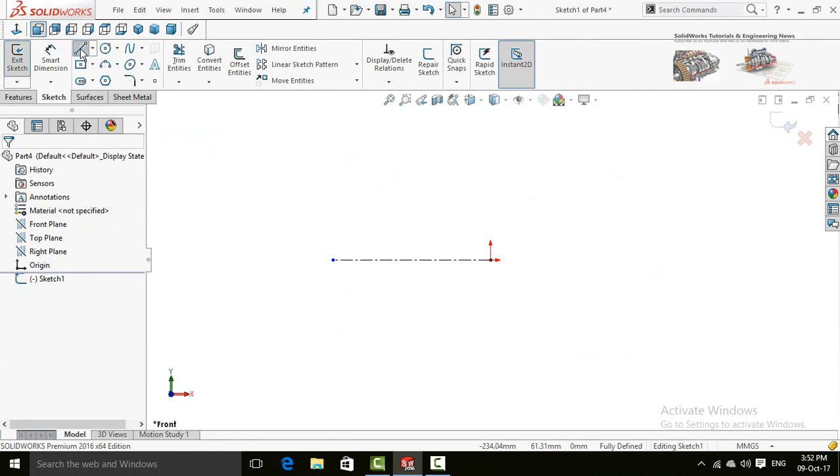So sketch on front plane. Now draw a center line. Start it from origin horizontally. Now press escape button. Again select line and draw a sketch like this.

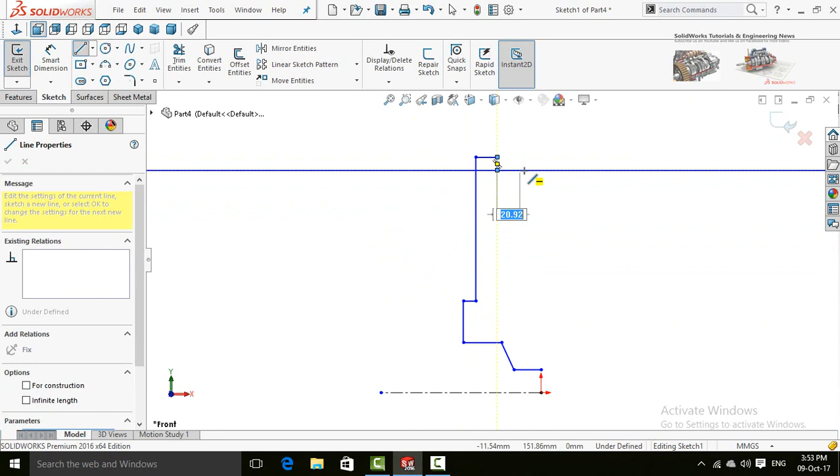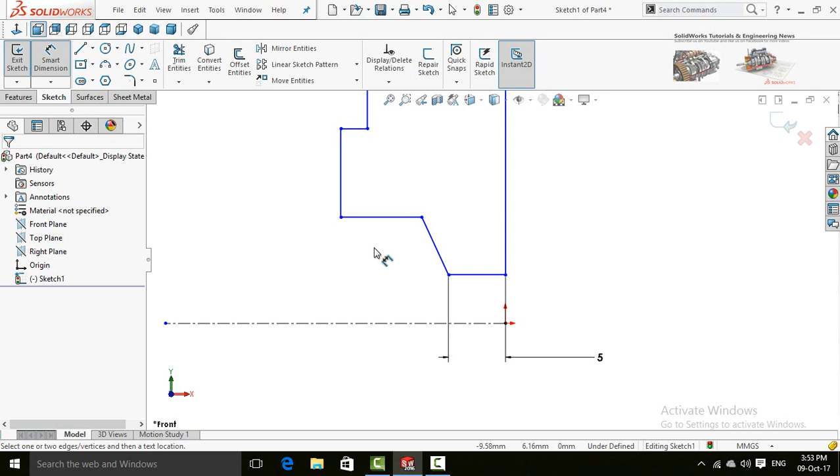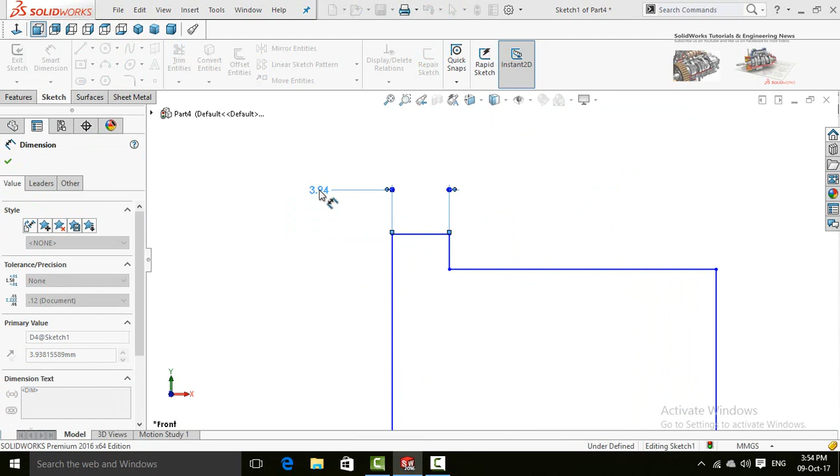Now define it by smart dimensions. So this distance is 5 millimeter. This distance is 18. This is 3. This is 20 and this is 8 millimeters.

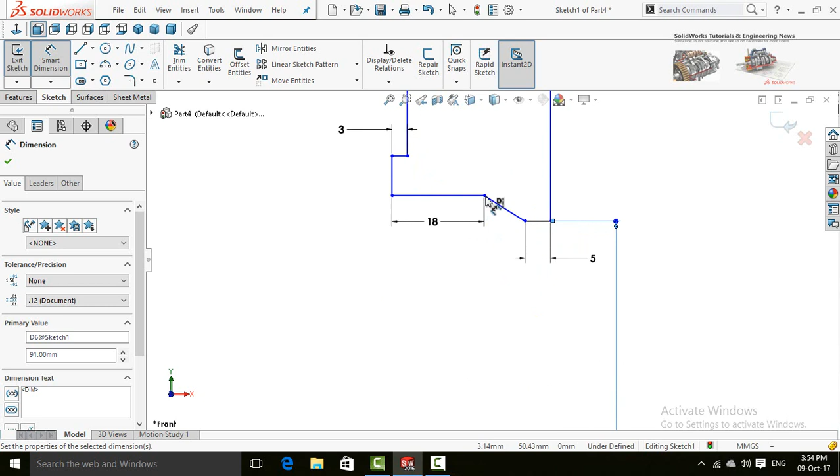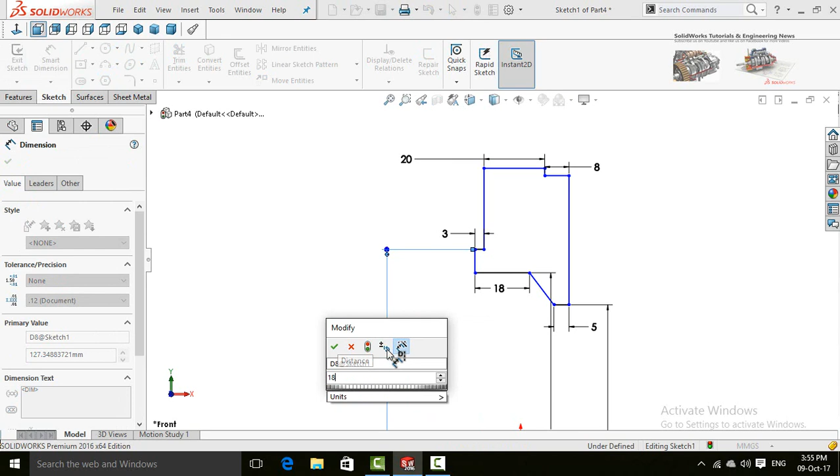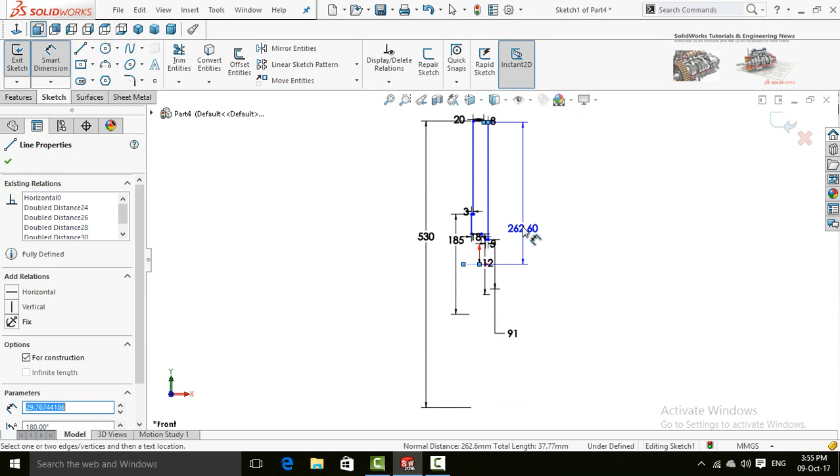Now define diameters and bores. So first of all, this bore diameter will be 91 millimeters. Diameter of this point will be 112 millimeters. This diameter 185. This diameter 530. And this diameter 463 millimeters.

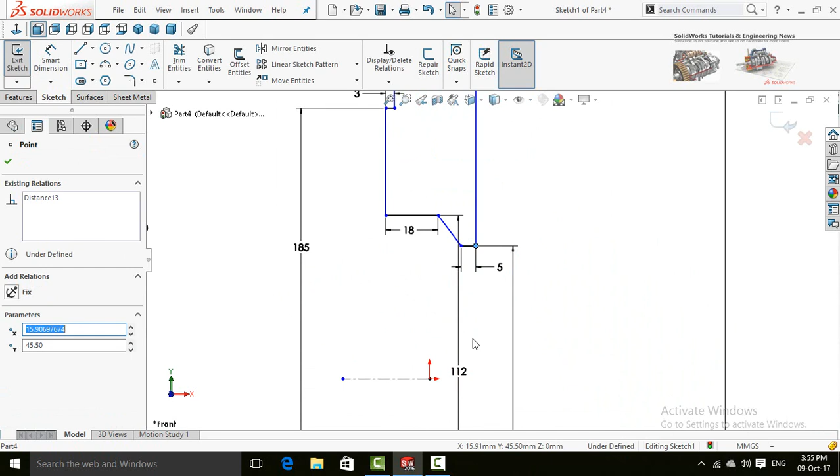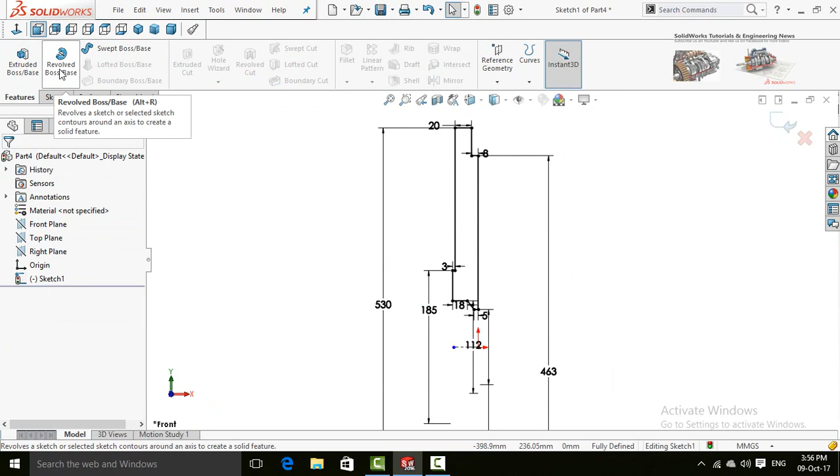Now zoom in, press and hold Control key, select this point and then this origin. Release Control key and then select relation make vertical. Now our sketch is fully defined and it is ready for revolved extrusion. So now click on Features tab and then select Revolved Boss Base command. Press OK button.

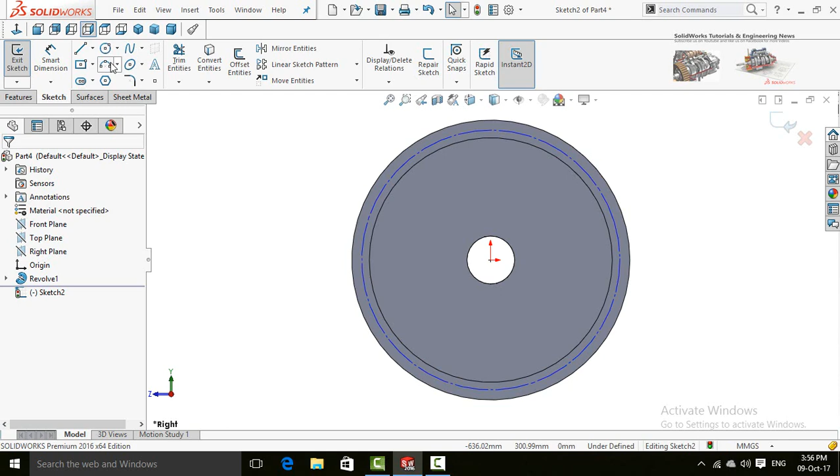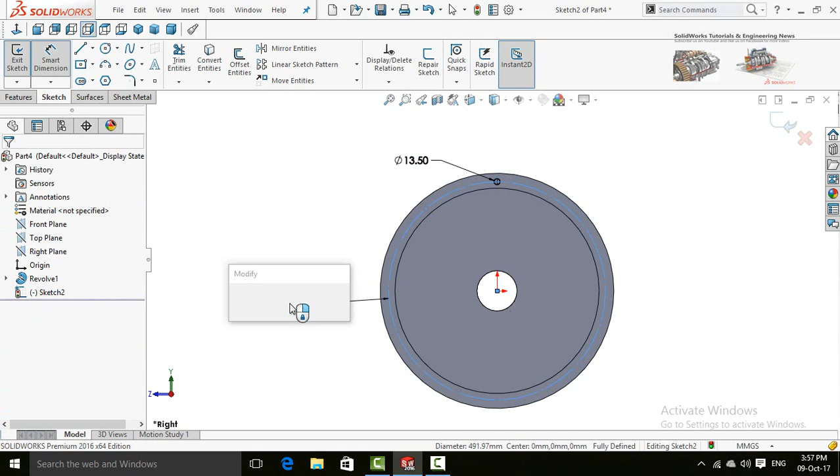Now select this face and then select Sketch. Make normal to and draw circle. In the left side, select for construction geometry and press OK button. Now draw another circle. Define it. 13.5 millimeters and define the circle, 498 millimeters. Now click on Features tab and then select Extruded Cut command. Drag this arrow and press OK button.

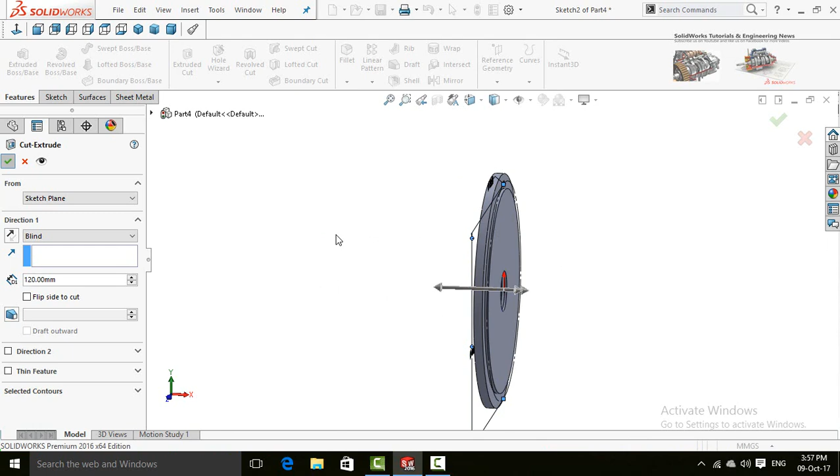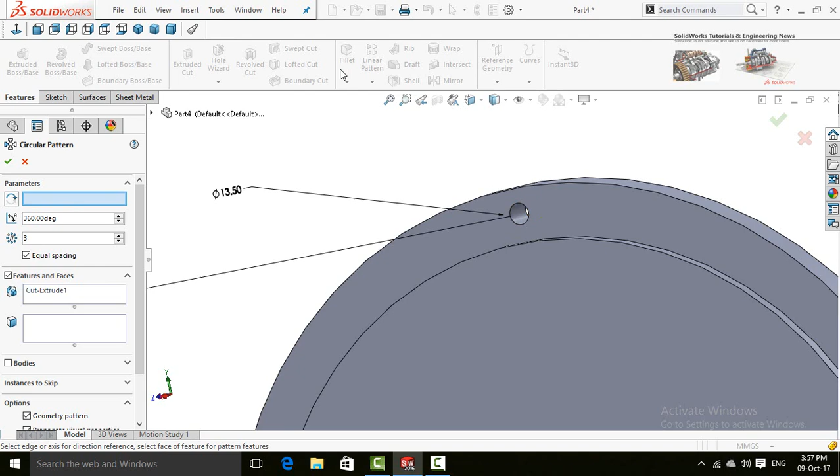Now zoom in, click on this arrow below the linear pattern button and then select circular pattern. Click on this box, features to pattern, and then select this hole. Now click on pattern axis and select this circular edge. Type here the quantity, which is 12. Press OK button.

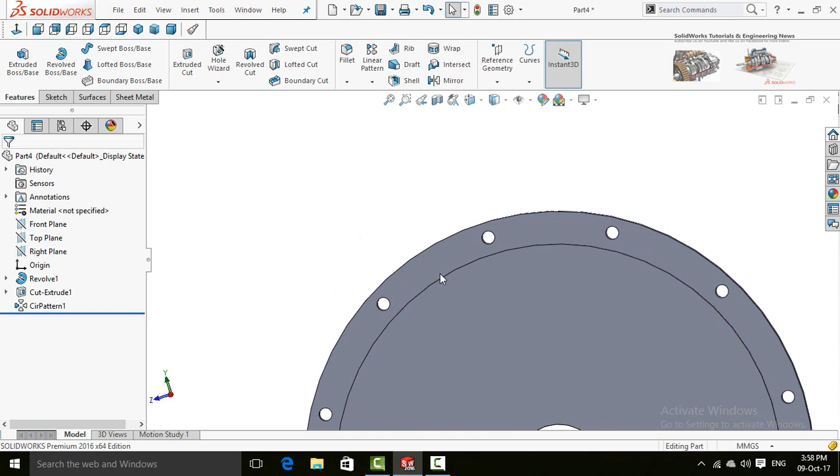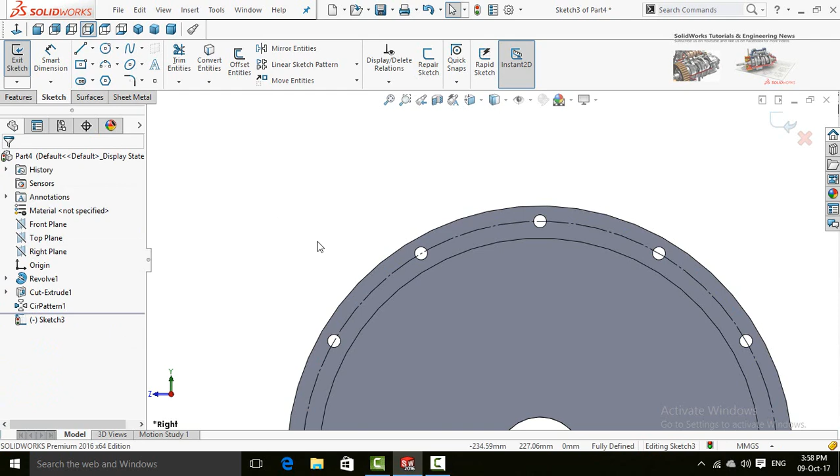Now we need 2 more circles just between both of these holes. So for that, again click on this face and then select sketch, make normal to. Now draw a circle, start it from origin to the origin of the circle. In the left side, select for construction and press OK button. Now draw a center line and start it from this origin to the origin of whole part and end it at this point. Now use trim entities command and trim rest of the circle.

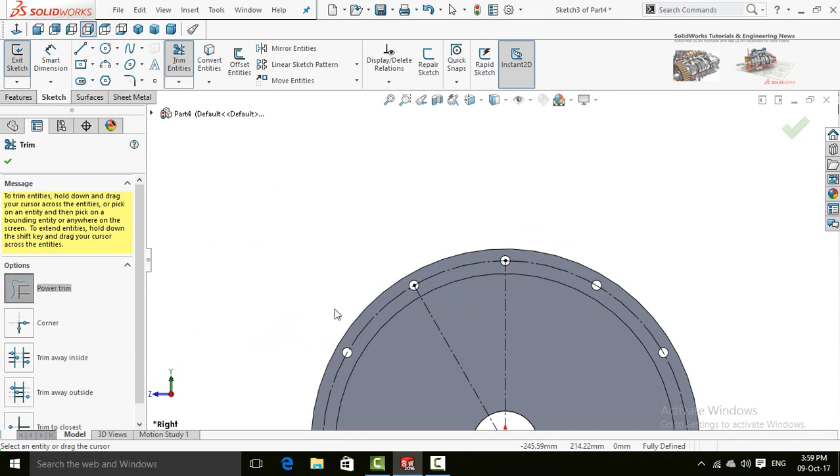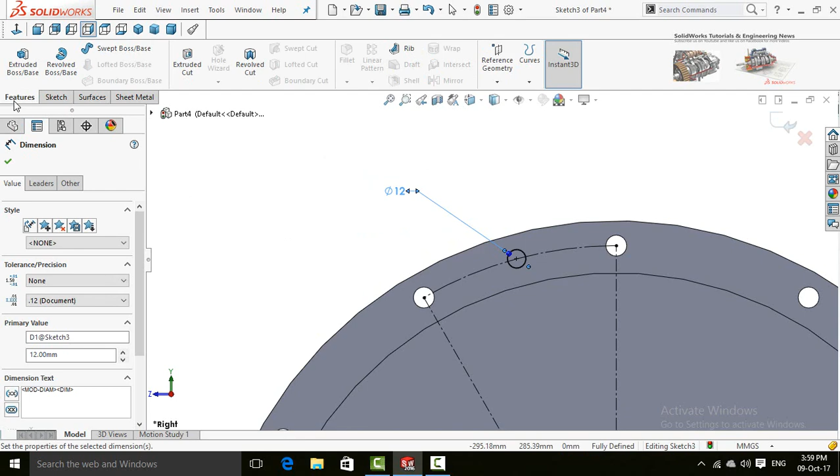Draw another circle in the quadrant of this arc. Define it. 12 millimeters. Now click on Features tab and select Extruded Cut command. Press OK button. Again use Circular Pattern command and select this circle. Now pattern axis, select this circular edge, quantity 2, press OK button.

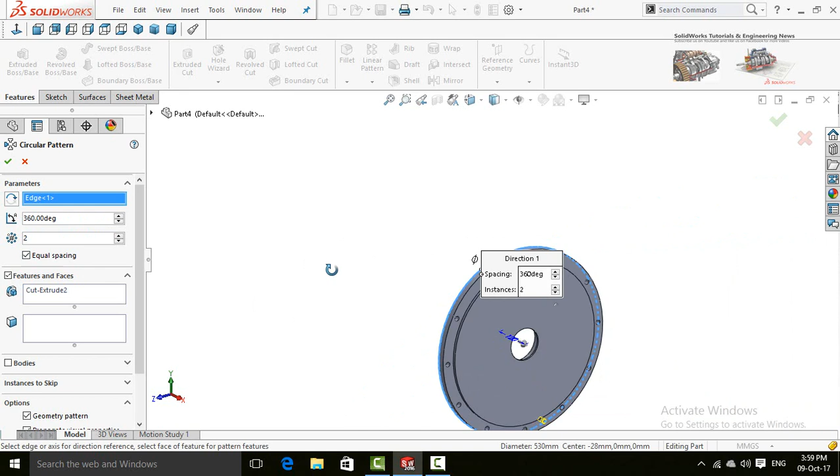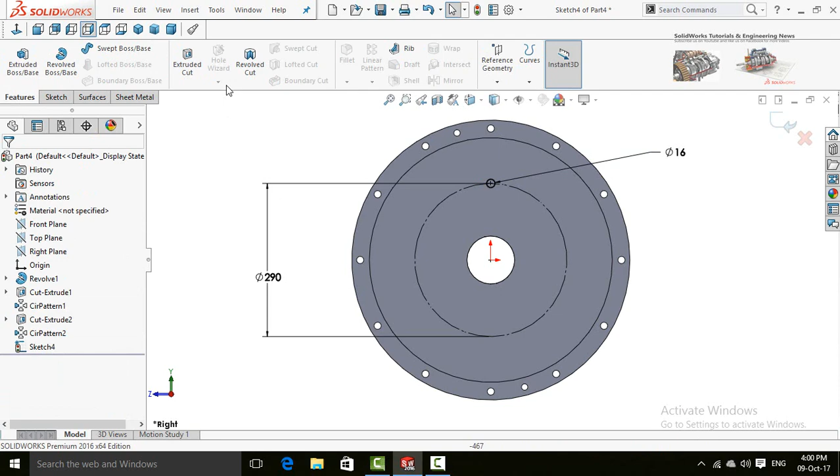Once again click on this face and then select sketch, make normal to, draw a circle, start it from origin. Similarly for construction geometry, press OK button. Draw another circle. Now define them. PCD is 290 millimeters and drill size is 16 millimeters. Press OK button and then extruded cut it. Again press OK. Use circular pattern command. Now click on pattern axis and select this circular edge. Quantity is 4. Press OK button.

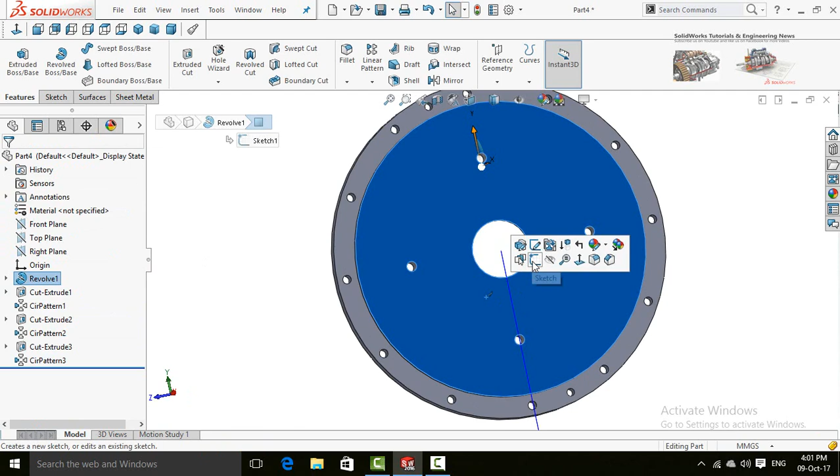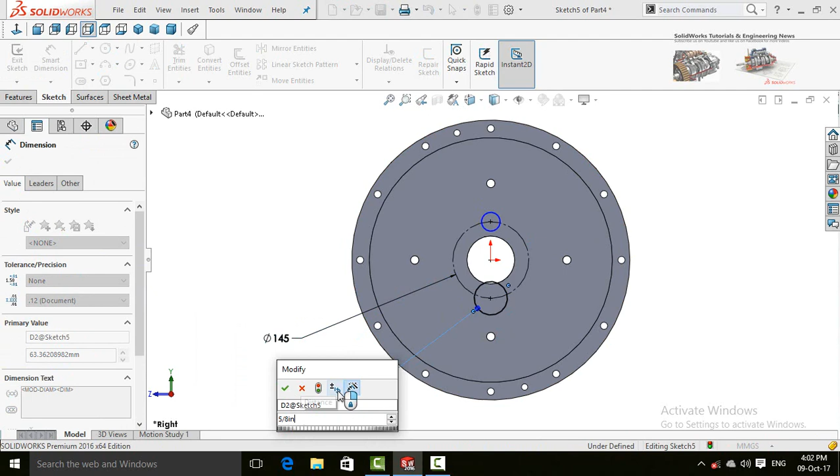2 more circles are left, so again click on this face and then sketch, make normal to, draw a circle for construction geometry and press OK button. Another circle, one on this quadrant point and second on this quadrant point. Now define them. PCD is 145 millimeters and drill size is 5 by 8 inch. Press escape button. Now select both of these circles and make relation equal. Now sketch is fully defined. So click on Extruded Cut command from Features tab and press OK button.

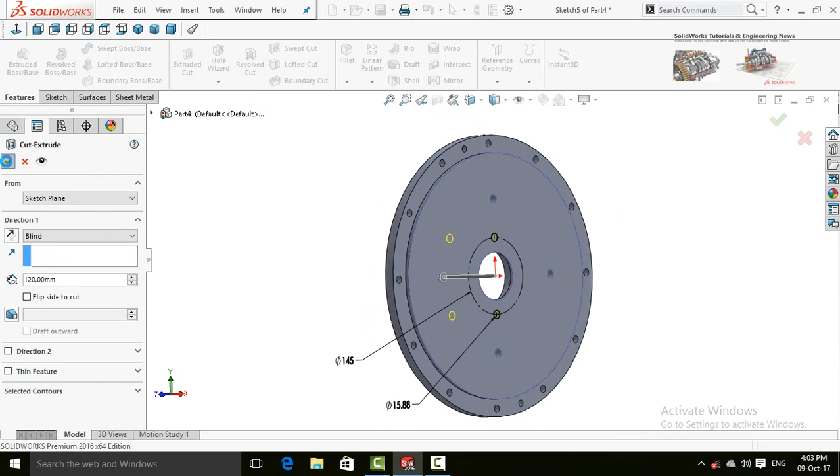So our this part is ready for manufacturing.